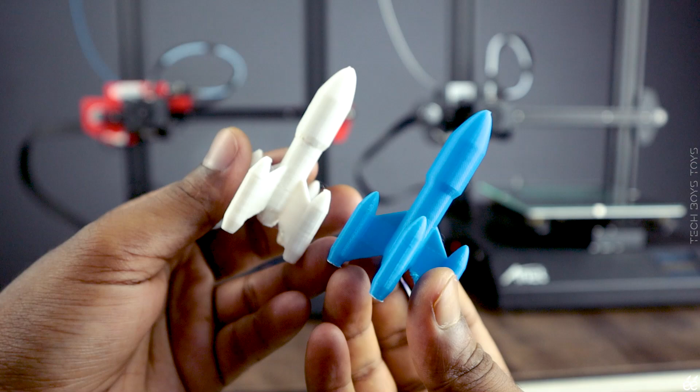Mainly we create a 3D STL file for printing, and after that we convert it into G-code. But we often think that if the printing quality isn't good enough, the 3D file may be the reason for it. That's totally wrong.

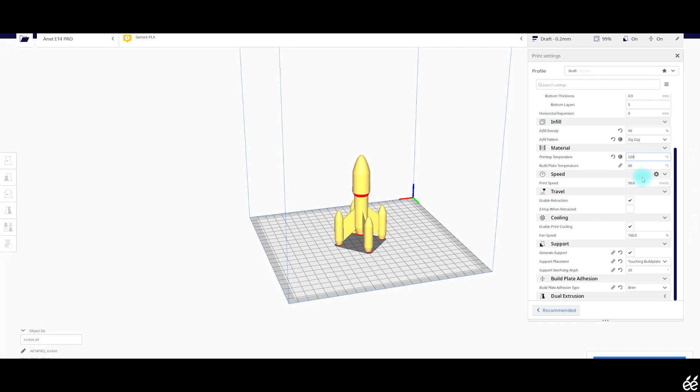All the 3D printing quality depends on the slicing software, type of printer, and mostly on the filament. But if you made a bad design that's not suitable for printing, that's a drawback of my concept. That's enough talking, now let's jump into the facts.

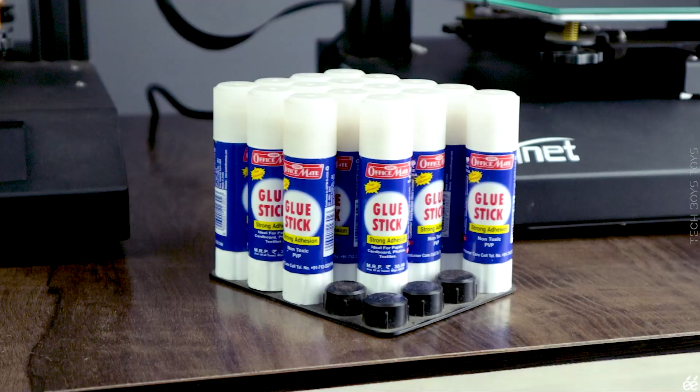First of all, let's talk about the 3D printer. Glue the bed - you must glue the heated bed surface to help the print stick. You can use this type of glue stick, which is reasonably priced. This is the most recommended step for printing work. Most people skip this step at first, but without a good base, the print will not be the best quality.

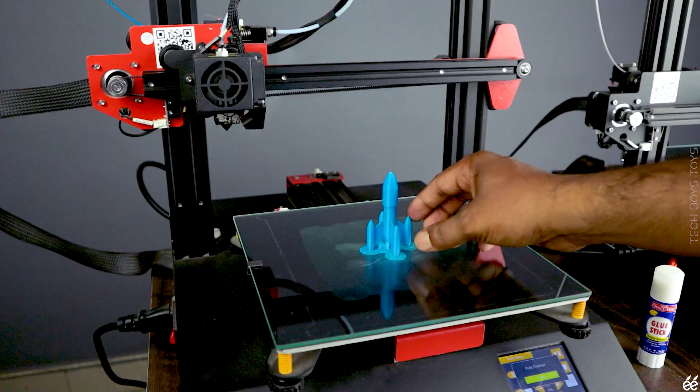Don't forget to reduce the bed heat before removing the print. After attempting 8 to 10 prints, you must remove the bed glass and wash it with water. The glue will easily come off with water.

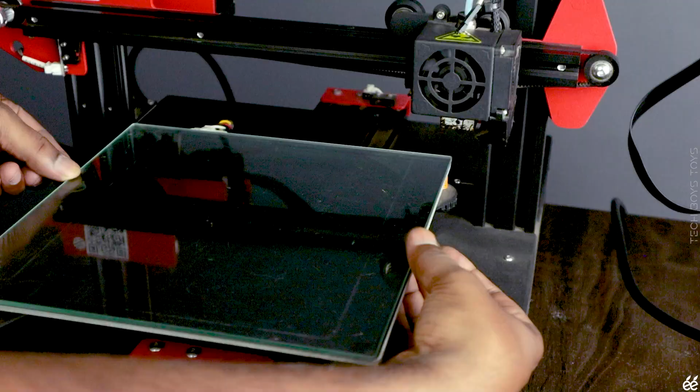Leveling the bed is necessary for an appropriate base. You need to use 2 to 4 A4 size papers to level the bed.

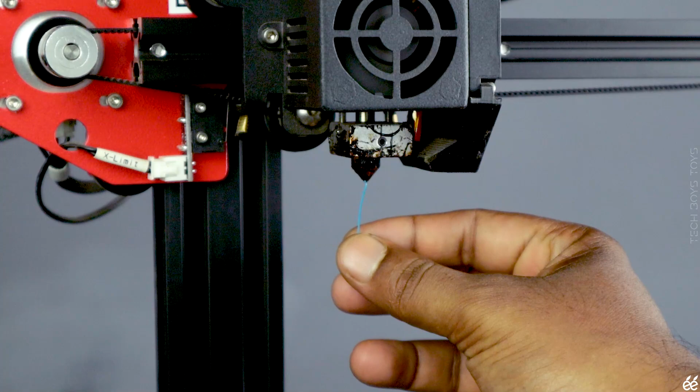Remove the first melted filament. You'll get some extra melted filament at the starting point, so you can use a knife or a thermocol cutter to remove it.

This is all about the hardware section. Now jumping into the software part - the slicing software. Slicing is the main key point to run the machine according to your requirements.

Here is the interface of Cura Slicer. It may differ according to the version, but most users prefer the Cura software.

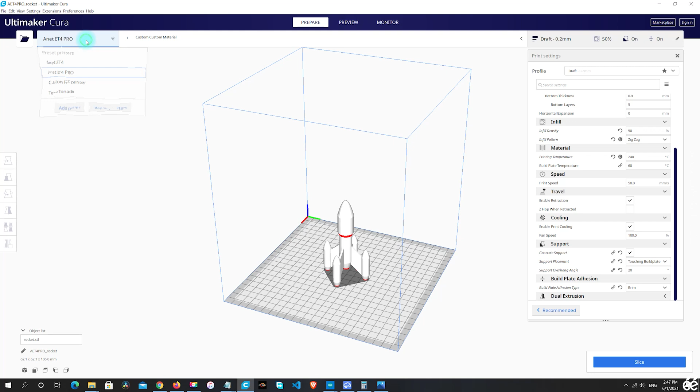First you need to select your printer type. This software has different slicing algorithms for different types of printers. Selecting the wrong printer may cause inappropriate prints. If you have a custom made 3D printer, you can use the custom settings and add all the dimension details.

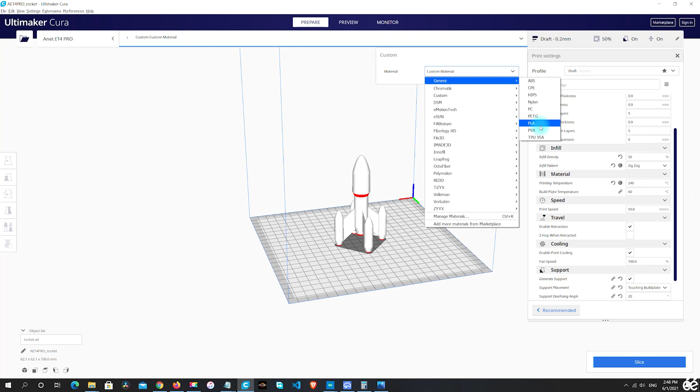Selecting filament - most users are using PLA or ABS material type. Profile selection - there are lots of options in this section. You may be confused about which to choose, but I'll tell you the right option.

Try to print in draft 0.2mm, which is the best profile for printing. If you really need a high quality print, select the normal 0.15mm profile, because your printer isn't highly capable of printing in fine or extra fine profile. If you choose fine or extra fine, you'll face clogging problems.

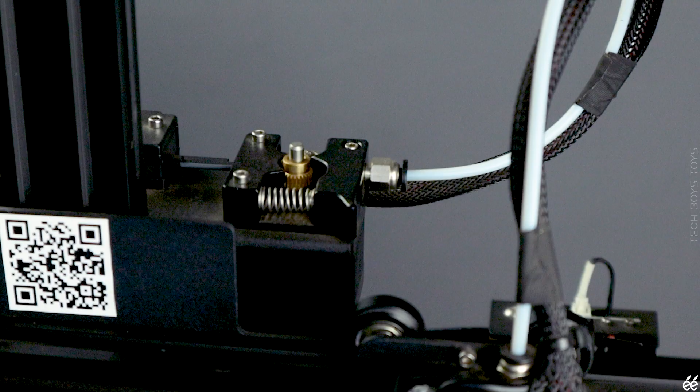In these settings, Cura will set the minimum space between two layers for the Z-axis, and the extruder compensates the filament for minimum filament delivery, which causes clogging in the hot end. You can hear a tick-tick sound from the extruder.

After that, you need to clean the hot end by removing the feeding tube, and that's frustrating work. So try to print in draft or normal profile.

Infill density must be at minimum 5%, and if you set it at maximum 99%, your print gets more strong and bulky. Filament temperature:

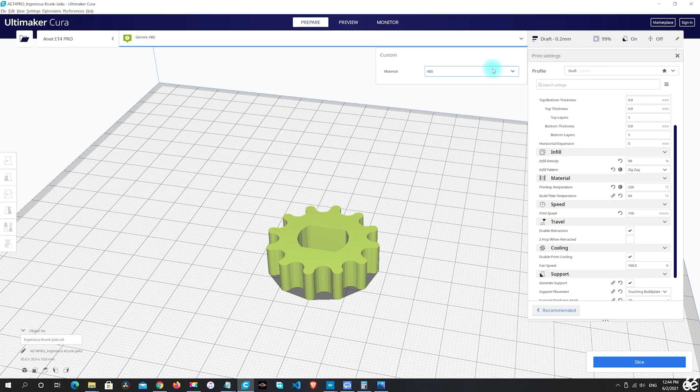For ABS, set the printing temperature to 250 degrees and heated bed temperature to 100 degrees. For PLA material, set printing temperature at 220 degrees and build plate temperature at 60 degrees.

Support angle should be at minimum 20 degrees. And if you design a complicated model which has more elements on both front and back sides, then print half of the model first and print the other half next time.

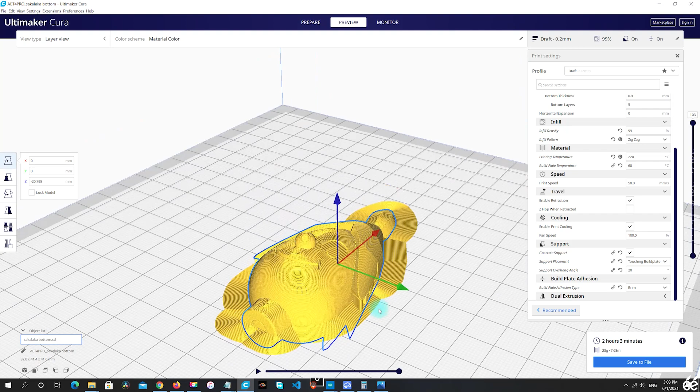After completing the print, glue it. Build plate adhesion - the most noticeable thing is build plate adhesion. Always prefer the brim option for PLA or ABS material.

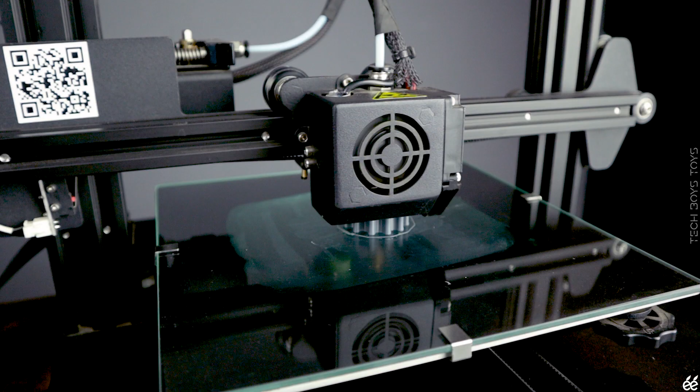If you're printing gears or medium size models, choose the skirt option. When working with big size models or ABS filament, you must choose the brim option.

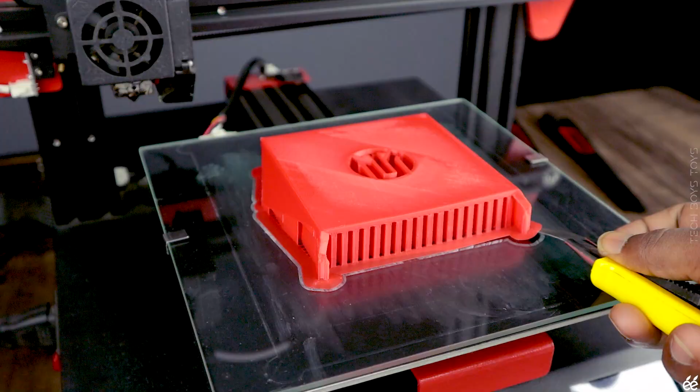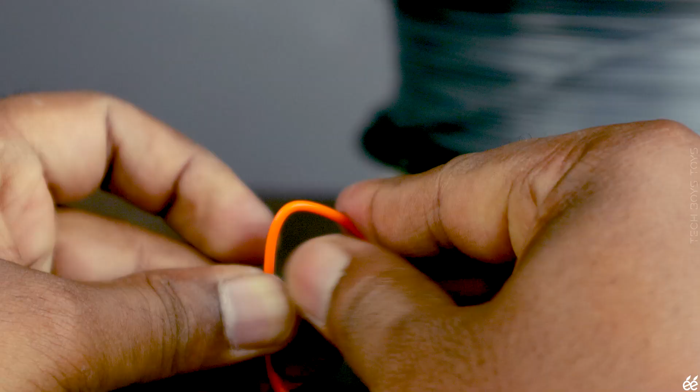We've done the software process, and the last thing is selecting the filament material. ABS is a hard type filament which needs more temperature to melt, and PLA is a flexible one which needs less temperature.

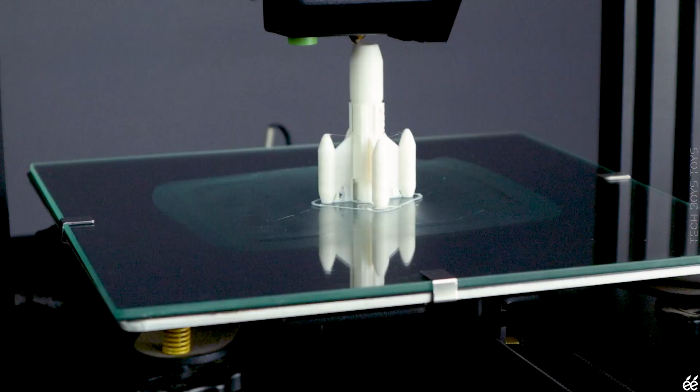For printing gears, strong models, or multi-time usable parts, you need to choose ABS. If you're making basic project parts, cabinets, or big size prints, you should choose PLA.